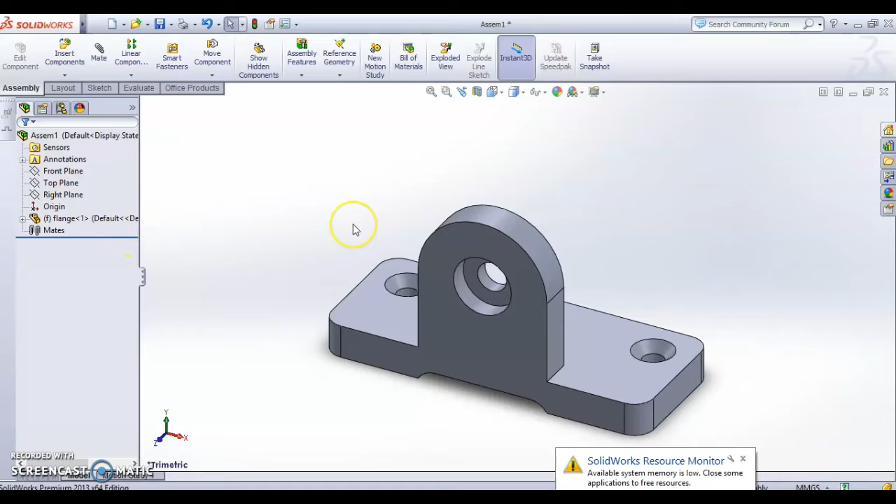Next we want to insert another component, which is the stand, the second part. Put it here roughly, because we want to attach it to the flange. So just put it here, and the same goes for our small parts, which are counter bore, countersink, and nut.

We have to put our counter bore here, and then again insert our countersink screw here, and we need another one of the countersink screw. Just put it here, and last one we have our nut back here.

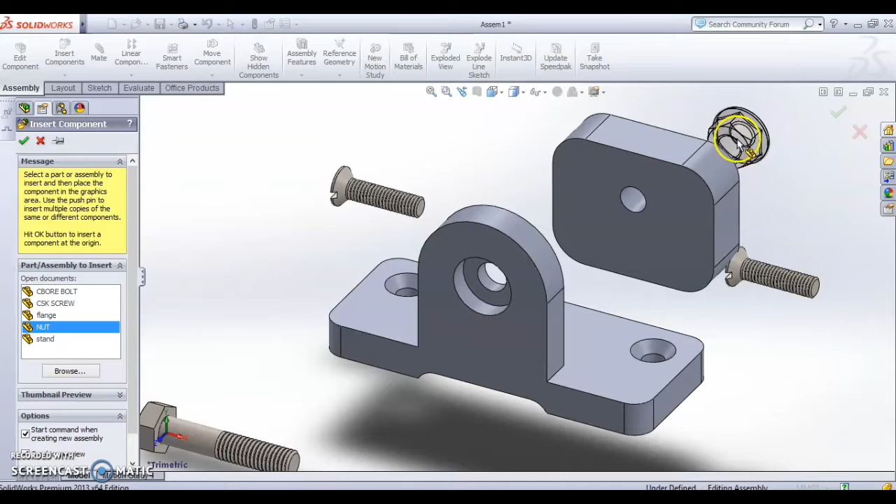So the stand component here seems to not be in the position that we want, right? So we need to rotate our parts. To rotate, we click here, move component, either we want to move or rotate. Just click rotate first to rotate our part.

Let's say for example I take this one and make it straight like that. Same goes for this one. Our nut also needs to be rotated, as well as our counter bore. If you want to move the component, just click move and bring it nearer, then continue rotating our part so that the angle is okay. Then click OK here.

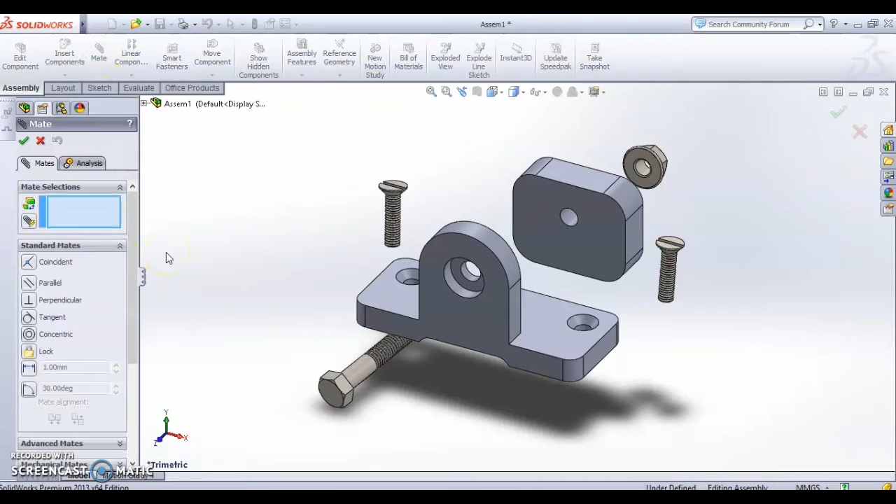So now we have the position of all the components. Now we want to mate. In mate, as mentioned before, we only focus on concentric and coincident. First thing first, we do the concentric. What concentric can do is align the hole. Just click the thread here to align with this circle, the hole.

Same goes for this screw, we want to do concentric, right? Click OK first. Again, concentric this one with this hole. Click OK, and then concentric again with this hole.

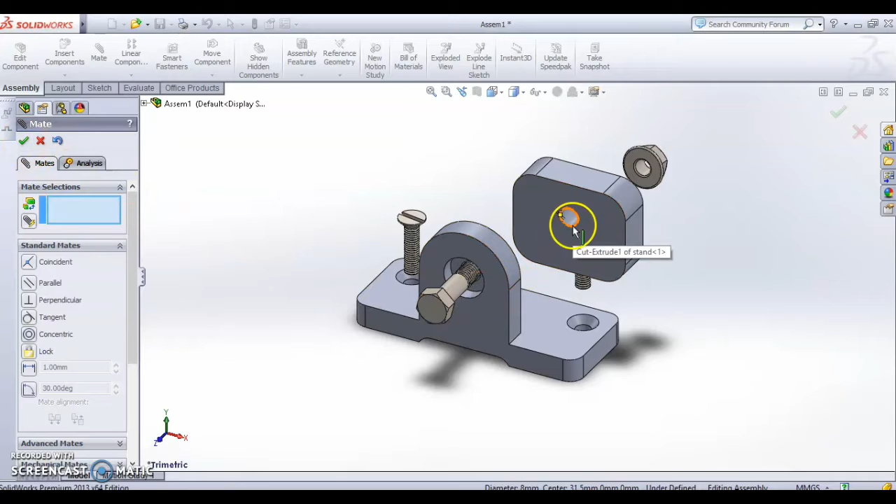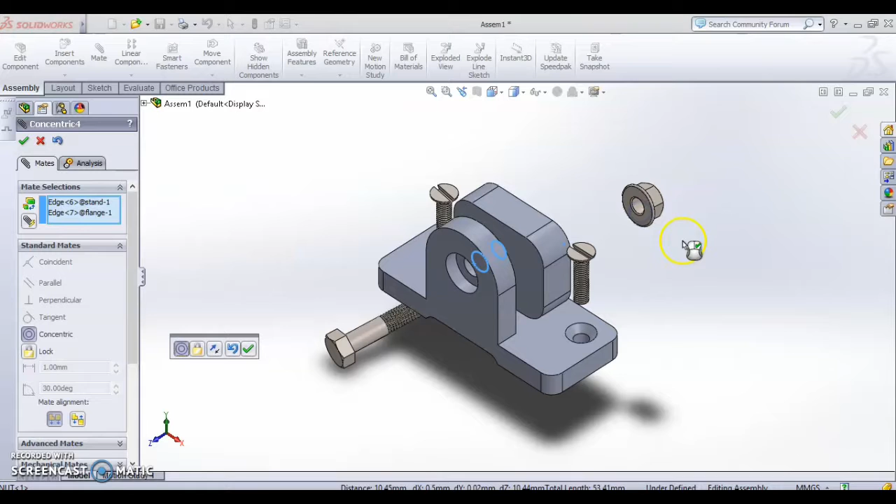Concentric again, this hole with this hole. Don't forget to click OK. Again, concentric this hole with this one. Nice, one more, click OK.

Concentric again, this screw with this hole. Nice. So now we have already made concentric all the screws and bolts through their own holes.

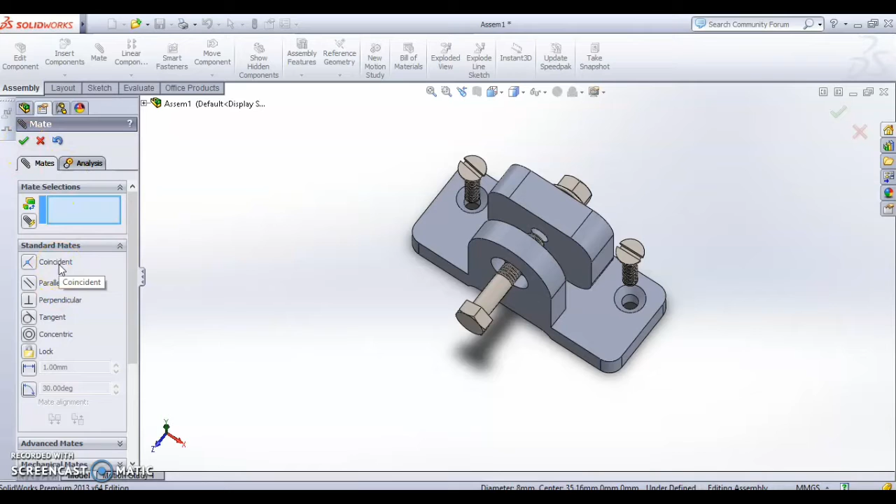Now we want to do coincident, to make it attached to the surface. Coincident is focused on the surface. So let's take this surface first with this one. It will automatically engage with their surface. Click OK. Now coincident again from this surface to this surface.

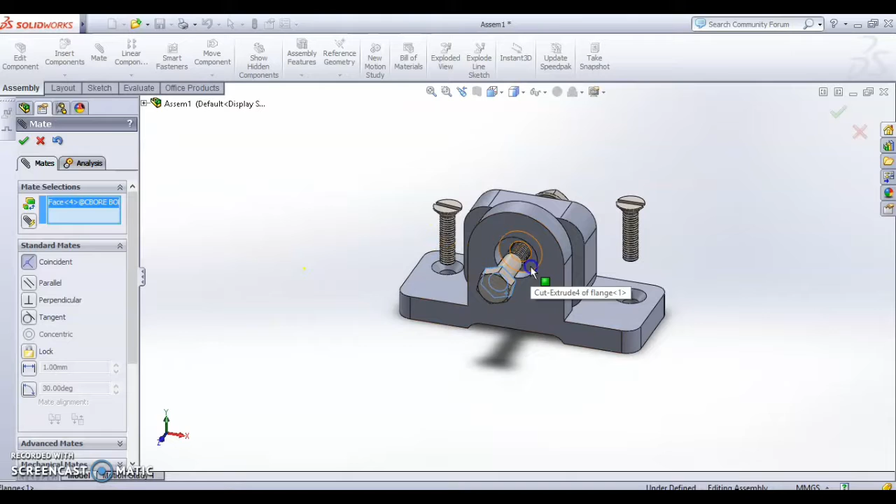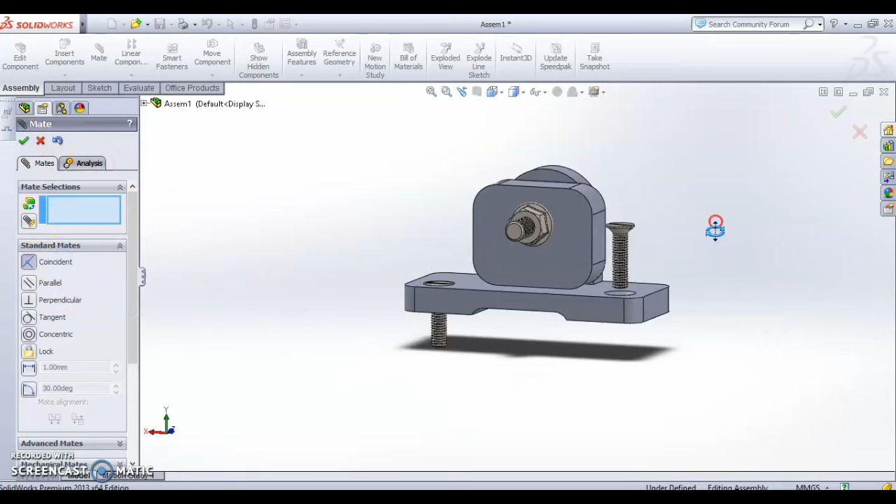Okay, nice, and then click OK. Coincident again between this surface and this surface. Nice, okay, and then coincident again, countersink surface with this, and last one, this surface with this surface. So that's it, that's how we assemble our parts.

Now we are going to do the exploded view. So how to do the exploded view? Under assembly, click exploded view. Then we have to click plus here so that we can see all the manager tree down here, all our product. We need to start with the parts from the bottom because this is the last part that we assemble, right? So we need to explode this one first. Start from this one, just click nut. So we have already the direction, the path of the nut.

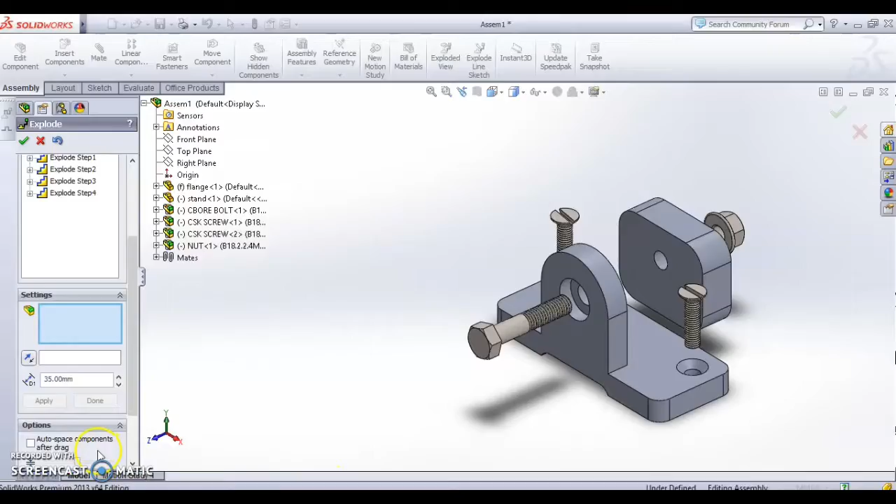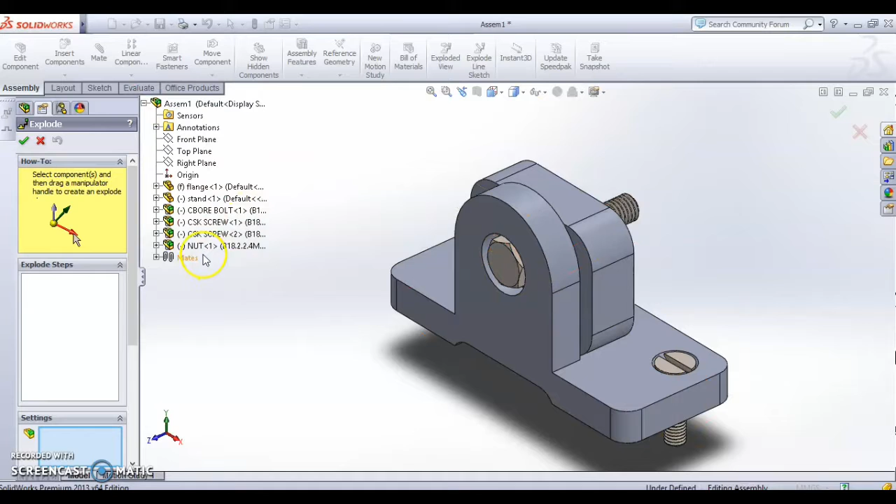Okay, so we have our assembled parts. In order to start exploding, we have to click under assembly here, click exploded view, and then click the plus sign here. If it did not appear, you just click here to make it show like this. So we have to make sure that if you want to do the exploded view, we have to start from the part at the bottom, because this is the last part that we assemble, right? So click nut, okay, so it is selected, shown in blue color here, and then scroll down.

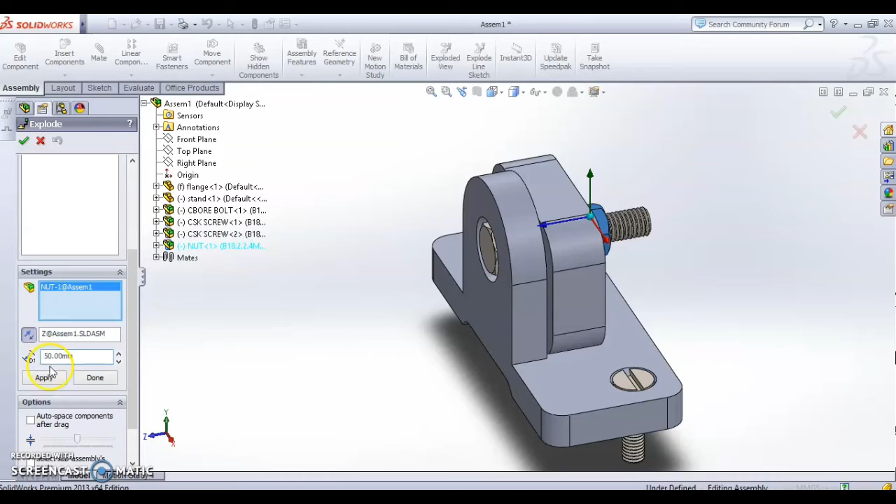So for the nut, we want to move it to the negative Z direction with 50 mm distance. So negative Z, we choose the Z axis first. Just click the arrow here, and then make it reverse direction. And then we change the distance to 50. And then click apply. Okay, done for nut.

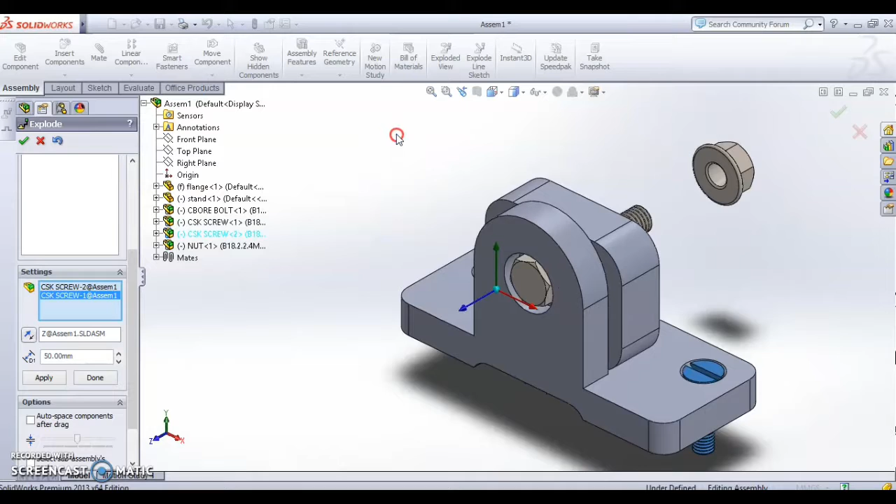Next, countersunk screw. Since both countersunk screws are similar, both the distance and direction are similar, so just click both. Make sure both are turned blue here, and then the direction is Y direction with distance 35. Okay, Y direction, so click this arrow, Y axis. No need to reverse the direction because it's going up with the distance 35.

Click apply and done. Okay, next we have counter bore. So for counter bore, we need to move it to the Z direction with 50 mm distance. Z direction, just click this arrow. No need to reverse the direction. Again, the distance is 50 mm, apply and done.

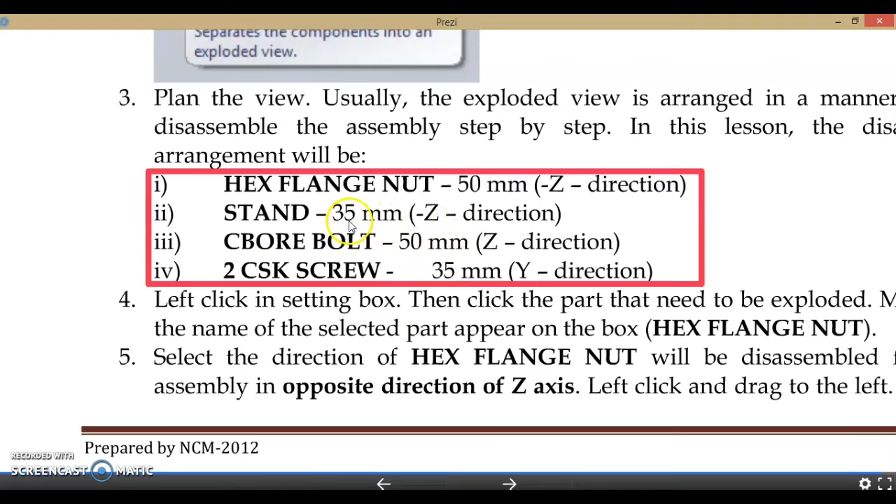And the last one we have is the stand. Our stand here, we want to move it to the negative Z direction with 35 mm distance. Negative Z, so we have to choose the Z direction first and reverse it, and change to 35 mm distance, apply and done. So we get the exploded view of our parts, and then click OK.

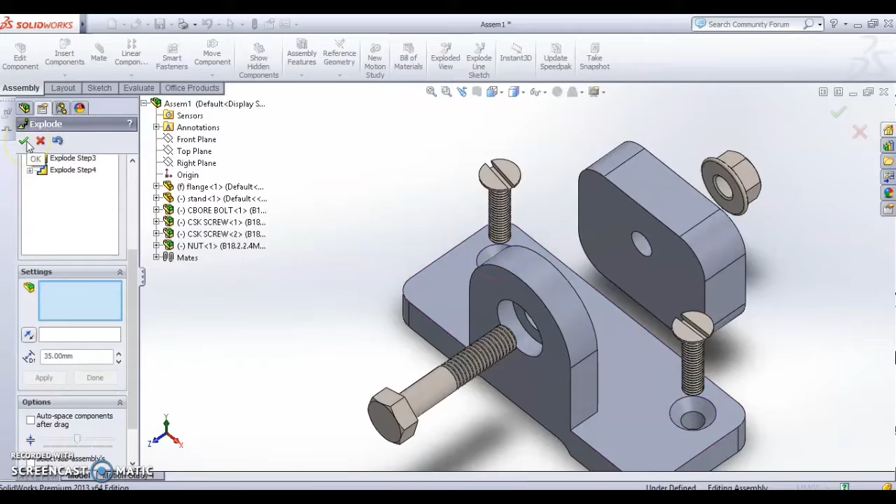Okay, so next we have to do the explode line sketch in order to show that the part is aligned in the same level. Click under assembly, explode line sketch. Then click the hole that we want to select. Then click OK.

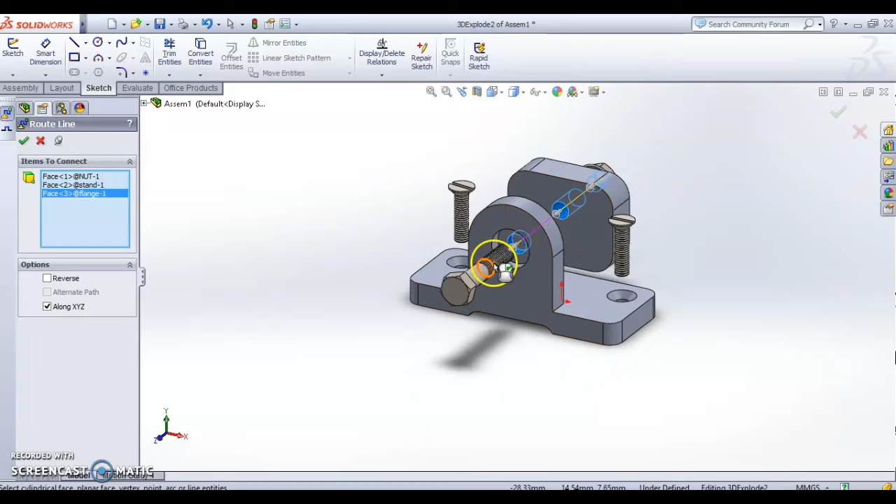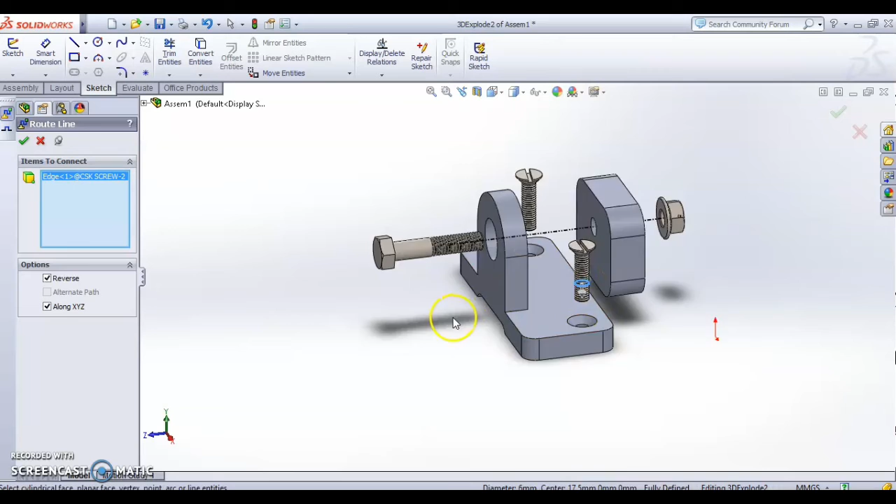Now for the countersink, with this hole, make sure the arrow is pointing down. Again, assembly, exploded line sketch, explode line sketch. The arrow pointing down, okay, and then click the hole. Then click OK.

Okay, and then last one for this item, reverse the arrow and then click the hole, and click OK.

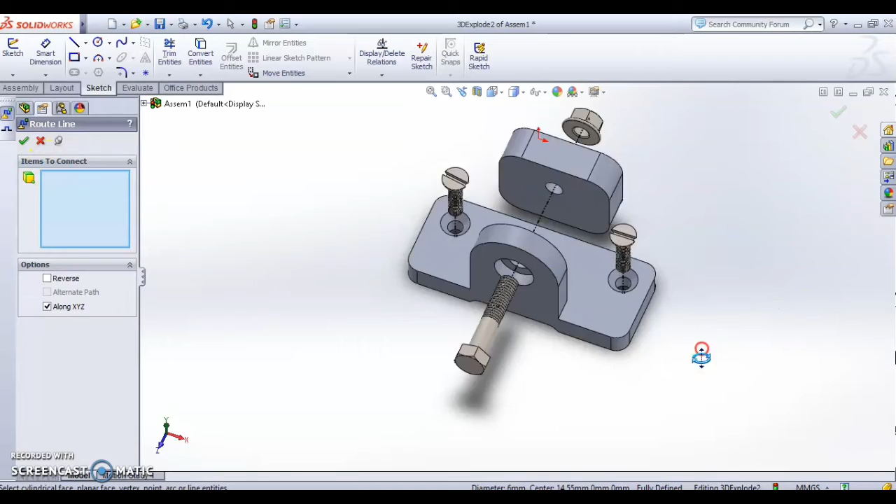That's it. Okay, now last but not least, you have to save your document. Make sure it is under the isometric view, and then click save as. You can use exploded flange assembly and then save. Okay, that's it. Thank you for watching.